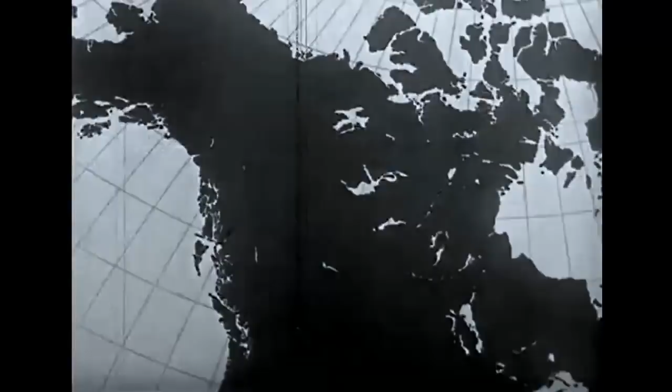Lockheed over North America: United Airlines, Continental Airlines Incorporated, Mid-Continent Airlines Incorporated, Northwest Airlines, Chicago and Southern Airlines, Braniff Airways Incorporated, National Airlines, Delta Airlines, Boston Maine Airways Incorporated, Trans-Canada Airlines, Pacific Alaska Airways.

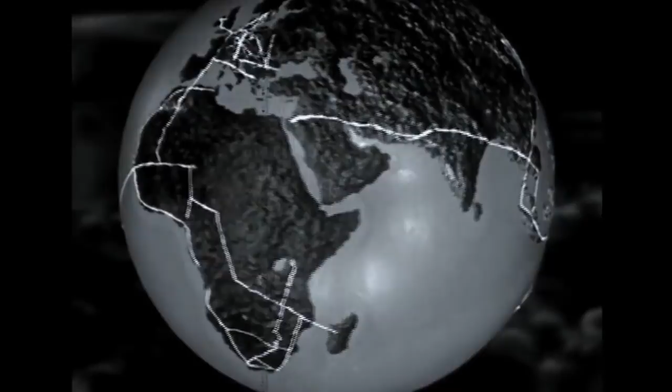Worldwide coverage, but it has not been accomplished in a day. It is the result of a smooth-running combination of men and machines. In that combination lies the story of Lockheed itself. It is a success story, modern, exciting, typically American.

The Lockheed Aircraft Corporation plant, Burbank, California, in 1926. And today, the same company, the same location, but quite definitely not the same plant.

As recently as 1932, sales aggregated the overwhelming total of $23,298.03. In 1940, actual deliveries amounted to more than $42 million, and conservative estimates indicate that in 1941 this figure will be more than doubled.

And to the men of Lockheed belongs a large share of the credit, to their skill and to their loyalty. They are a cross-section of typical American workmen: drillers, riveters, tool makers, die casters, machinists, and technicians. In 1931, there were only 300 of them.

In 1941, over 35,000. Every man who checks in, from office boy on up, has taken and passed exhaustive tests covering intelligence, temperament, and special aptitude to prove his individual ability. 35,000 American workmen, the right men for the right jobs to build the best planes.

This is not a trick shot made with mirrors. It is the drafting room of the engineering department where every new Lockheed has its beginning, conceived with the purpose of supplying the answer to definite needs of the aviation industry. To attain this goal, over 850 engineers make over 5,000 drawing plans, devoting a total of over 200,000 work hours to their mission of creating one new design.

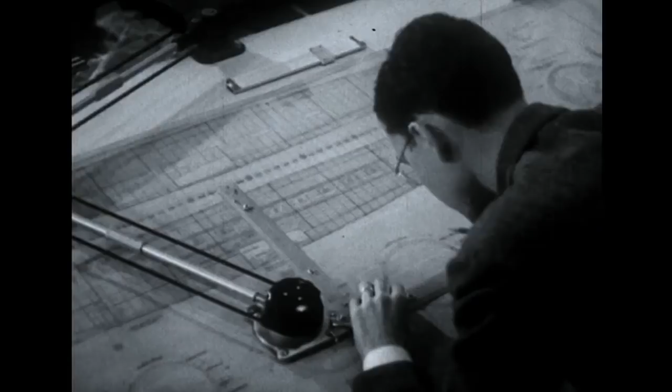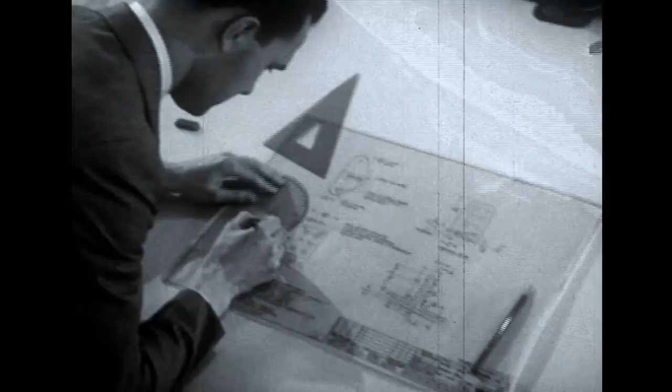The component parts of a modern airplane's wing, fuselage, and tail surface are almost countless in number, yet every single one of them must be engineered. Even the most minute part receives the greatest attention. Four separate drawings are made showing detail from four different angles. Although the part is no larger than a silver dollar, it will have to go a great deal further.

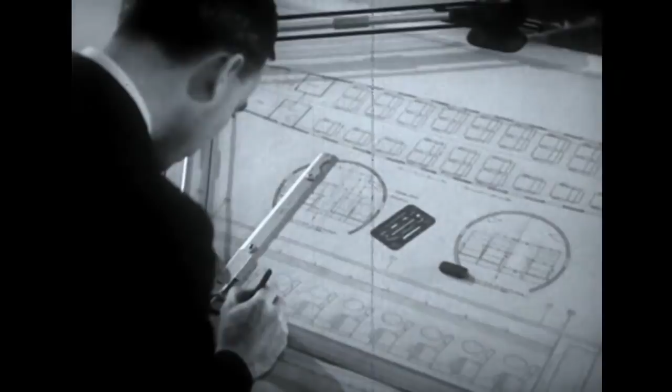The interior of a plane is one feature of design seldom associated in one's mind as coming under the supervision of the engineer. Yet one of his most important jobs is to provide utter comfort for passengers traveling through the air at high speeds. The Lodestar's cabin has been designed for this comfort.

Inside, the sound of powerful motors is reduced to a pleasant hum by scientific soundproofing and vibration control. Restful chairs, ample space, and headroom are results of thoughtful planning, and all Lockheeds are especially adaptable to the requirements of private owners. For businessmen to whom time means money, the Lodestar is convertible into a convenient and dependable office in the sky. The compact 12 becomes a comfortable lounge for attending important events anywhere at any time.

The cabin of Lockheed's new four-motor transport, the Excalibur, will look very much like this. Although the plane is still under construction, the engineers have built an exact replica, known as a mock-up, out of wood. In this way, every possible detail of passenger comfort can be effectively predetermined and applied.

But the ideas and plans that this man and the hundreds like him put into execution are not only those of Lockheed's chief engineers, but those of the entire flying world. For the Market Research Division maintains close contact with the operative branch of the industry. The staff compiles lists of important features relating to a plane's design. These findings are set up in the form of questionnaires.

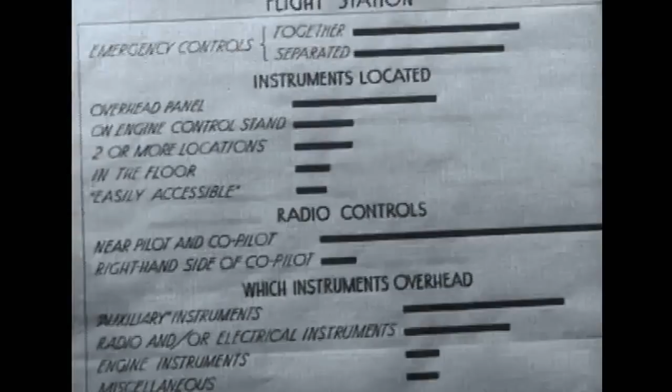Detailed graphs and charts are compiled by competent statisticians. No suggestion is too small. Every answer to every question is checked and noted. These findings are recorded in another pamphlet.

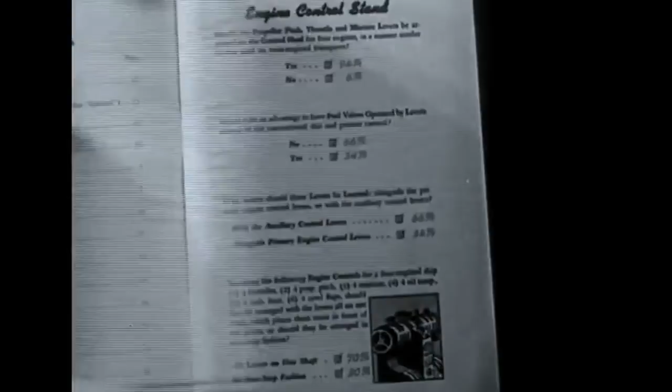You told us this is the way you would do it, on flight station, on engine control stand, and on rudder pedals. We asked, are brake toe pedals desirable? 93% said yes, 7% no. That verdict is submitted by men whose combined opinions represent the experience of over 16 million hours of flying.

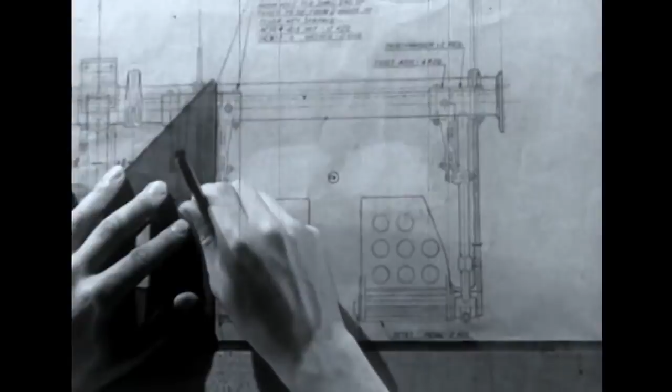These practical viewpoints, as gathered by market research, are submitted to the engineers. They combine these ideas together with their own creative ability in the conception and building of every new Lockheed plane. That's how Lockheed designs airplanes to suit the men who know airplanes best: operators, pilots, and regular airline passengers.

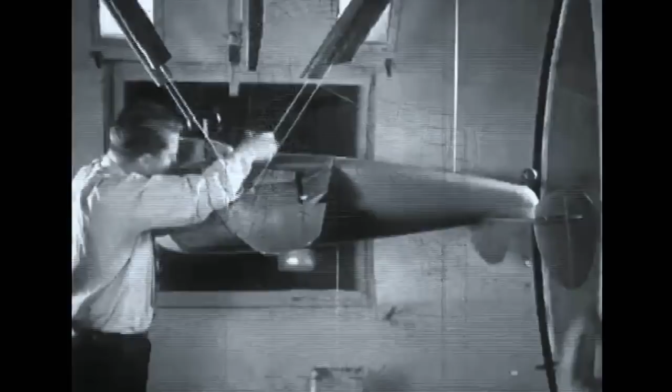And the first form a new plane takes is on paper. From these drawings and thousands like them, an exact scale model known as a wind tunnel model is made and is connected to instruments which determine its flight characteristics. The model is hand-carved, accurate to the fraction of an inch, weighs over 500 pounds, and costs more than $5,000 to build.

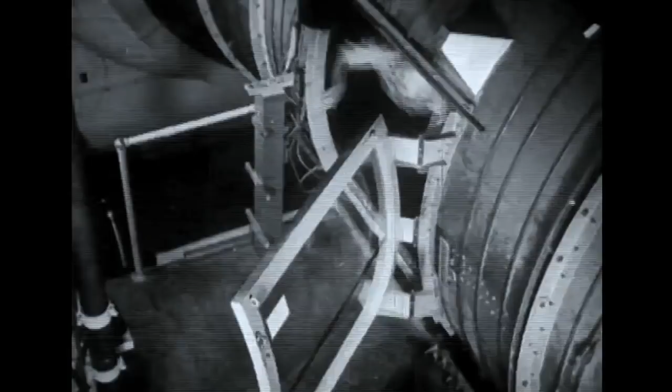The door is closed, the wind tunnel sealed. A flip of a switch and the wind propeller whips up to speed. The model is exposed to a far higher velocity than this 90-mile-an-hour wind.

The small wind tunnel model is actually subjected to and withstands a much greater force.

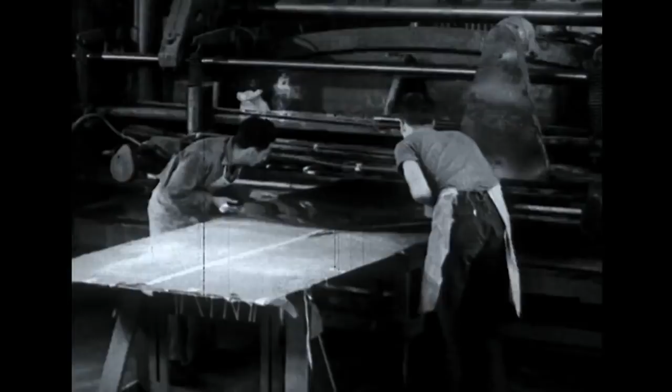Giant shears act as huge mechanical scissors. Metal sheets are slipped into place. The sharp blade strikes and cuts through them as if they were cloth.

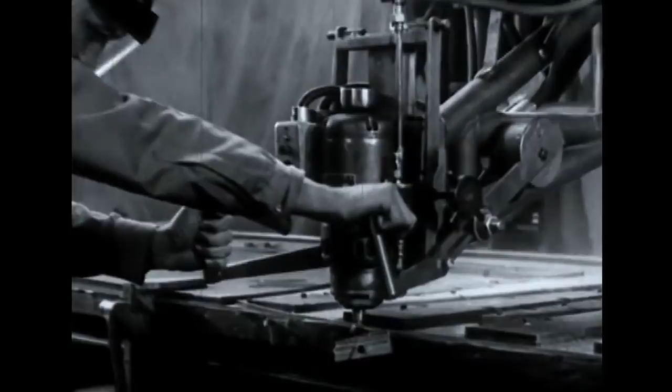The high-frequency router, a dental patient's nightmare, turns 15,000 revolutions a minute and cuts layers of metal into their first rough shape. The bit turns so fast that it must be cooled by a constant stream of oil.

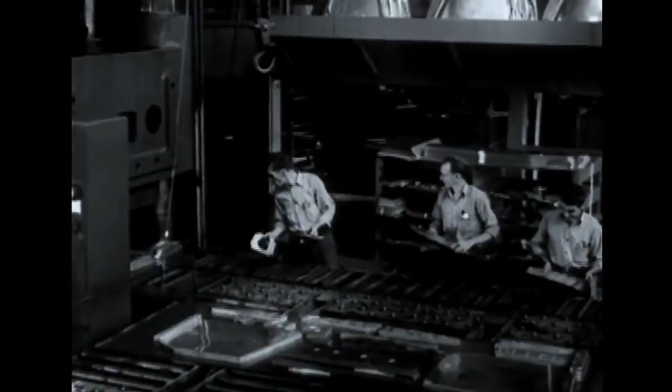The massive hydro press exerts an overall pressure of 9 million pounds, and it literally squeezes parts out of metal. An endless chain of roller conveyors carries a tray with the forms to workmen. They put the metal, which has already been cut to the correct size, in place on the forms. The tray now continues on its way into position under the press.

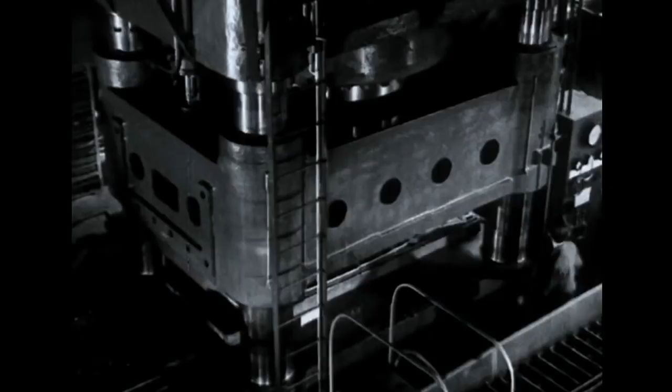The operator touches a switch, the press starts down, and look out below. Almost unbelievable pressure, an irresistible force, but under perfect control. And where plain sheet metal went in, finished parts come out. The hydro press turns out more parts in 1 minute than 2 men could complete in a whole day, and turns them out better and more accurately.

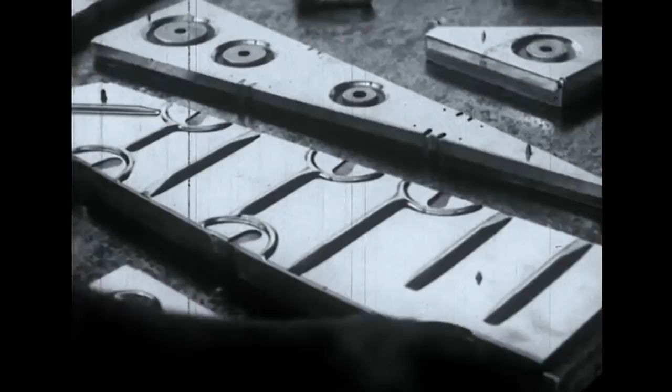A compressed air stamp which forges metal is an excellent example of powerful machinery under absolute control. Taps as gentle as a tack hammer, then the crushing impact. What a nutcracker this outfit would make. And yet its control is so delicate that it can crack an egg, at least so the operator claims. Look out there, a little too hard and you'll have an awful mess. Be careful.

Skilled men and precision machines have fabricated these parts, but even metal can be strengthened and protected. To do this, there are several types of processing. Complete electrochemical anodizing baths provide parts with a protective coating of oxide film.

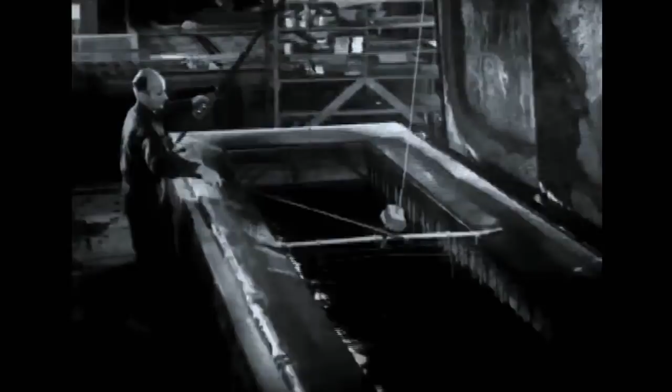This is a safeguard against the threat of corrosion caused by moisture. It is an interesting fact that these parts are protected against any harmful effects of moisture by being given a bath. Another type of bath is used for a different purpose.

In order to harden and thereby strengthen certain parts, they are immersed in a hot salt solution of sodium potassium nitrate. In large ovens, other parts are hardened by baking at 1550 degrees Fahrenheit and quenching them in oil.

It is easy enough to say that these parts, which will eventually be the plane, are strong. To prove that they are, to constantly guard the Lockheed measure of strength is the duty of the testing laboratory.

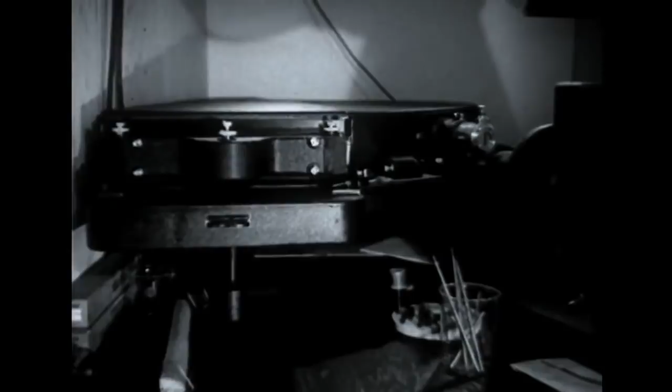A spectrograph is one of the most modern scientific testing devices. It analyzes the purity of the metal alloys which go into a plane.

Tremendous heat created by an arc burns sample filings of the metal. These filings are placed in a cavity on the lower of 2 acid-treated graphite electrodes and then burned.

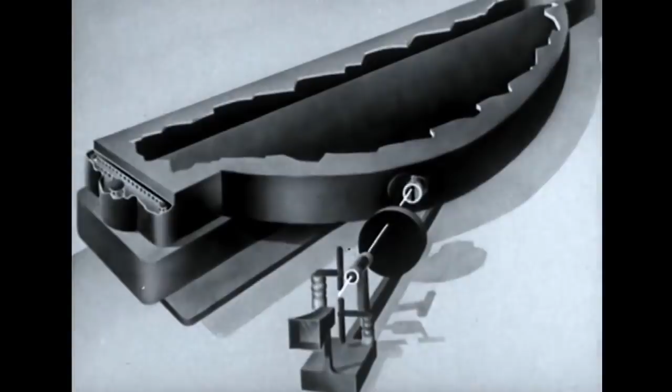The light of the burning metal passes through a lens and then through a rotating sector, the adjustable opening of which controls the amount of light falling on the slit. The light now passes through the slit and falls upon a diffraction grating.

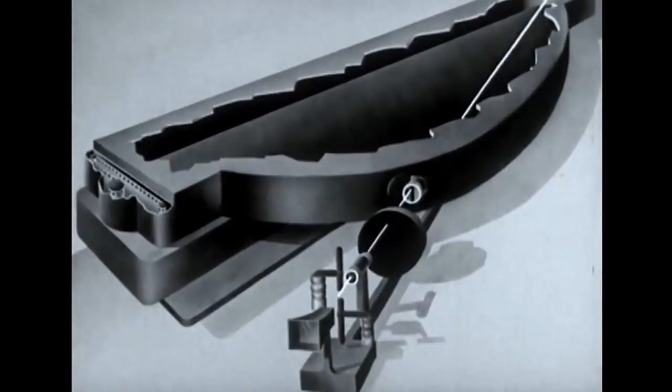This diffraction grating is a concave aluminized glass plate on which 24,000 lines per inch have been ruled with a diamond point. The light is separated by the grating into wavelengths.

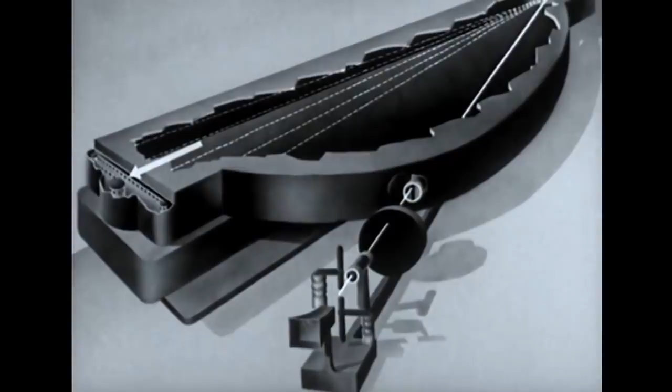These wavelengths, or light rays, fall upon a strip of film, and a photographic record of them is thus produced. Since each element has its own wavelength, from the developed film it is possible to determine exactly which are present in the alloy. In this manner, the spectrograph immediately detects all impurities, and any inferior metal is promptly discarded.

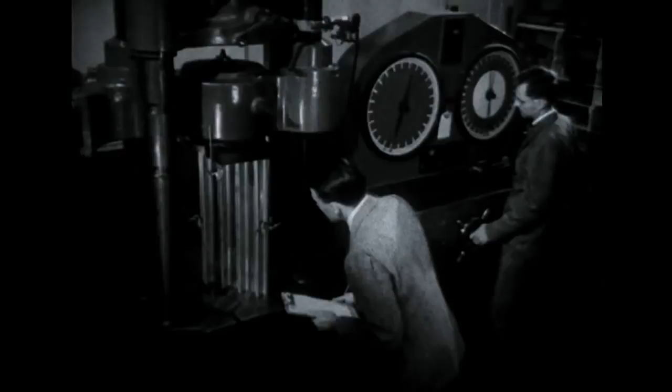The sole purpose of this huge machine is to break things. Its powerful jaws, capable of a compression of 300,000 pounds, are about to crush a small section of the wing in order to measure its resistance.

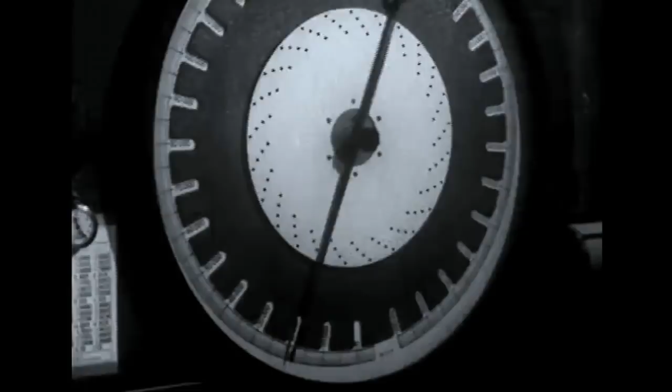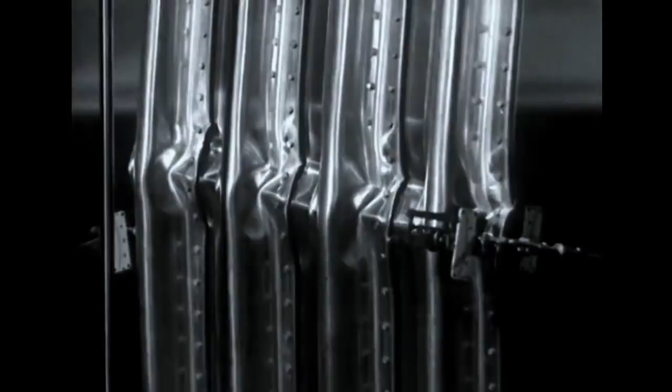Now watch carefully. The upper jaw is clamping down with an invisible, relentless force on the seemingly frail strip of metal. But actually, just how frail is it? 60,000 pounds? 70,000? There it is, a slight ripple. The breaking point has been reached, and it takes a pressure of over 80,000 pounds to even bend this frail little section of a wing.

For contrast, let's see what happens to a solid cylinder of concrete, which certainly appears much stronger. There is the first crack, and the concrete shatters completely under a pressure of less than 75,000 pounds.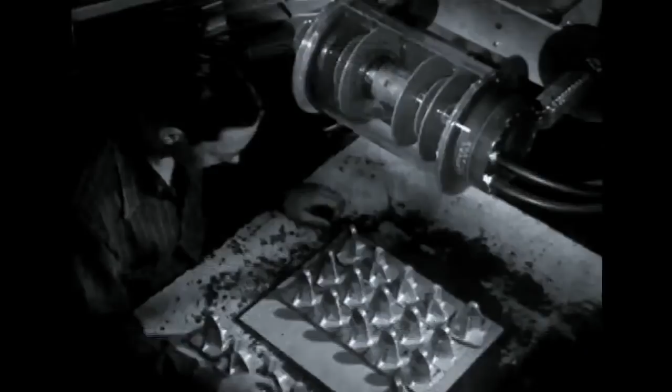All stressed parts, such as forgings and castings, are X-rayed for any possible flaws in the metal. Lockheed X-rays more parts than all other aircraft manufacturers combined. They may look new and shiny on the surface, but that doesn't matter.

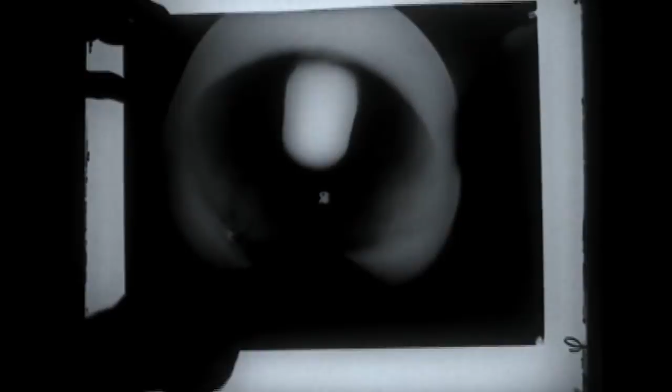What are they like underneath? This batch is fine, perfect. A different story here. Those slight, almost imperceptible flaws which doom it to the scrap heap would be invisible to any eye other than the X-ray. Therefore, although it is important to know what is on the outside of a plane, every stressed part is X-rayed because Lockheed thinks it is even more important to be absolutely positive of what is on the inside.

Yes, every part of this plane is built for the strength, ruggedness, and durability to achieve the highest speeds. And there goes the Lodestar. Carrying a full load of 17,500 pounds, it speeds down the runway for the takeoff. In 15 seconds, after a run of only 860 feet, it leaves the ground and soars into the air. Climbing rate 1,200 feet per minute.

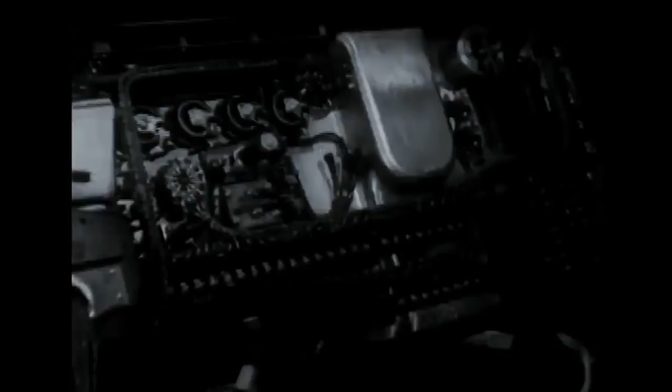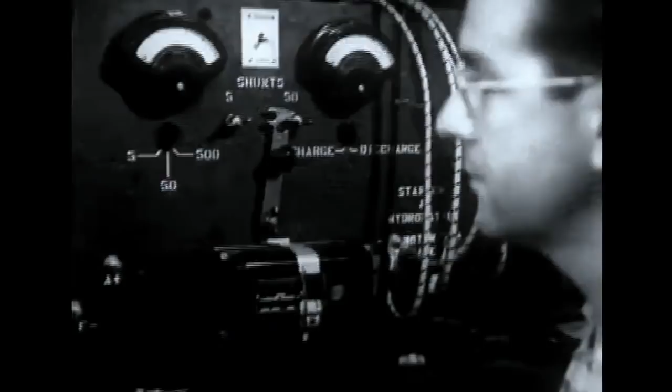While the plane is in flight, the dials and indicators on the panel are the guides by which a pilot flies. Over a half a mile of wire connects them with the controlling instruments, which must be infinitely accurate before they are installed. In the instrument testing laboratory, each instrument and accessory is, to all intents and purposes, actually flown before being installed on the plane itself.

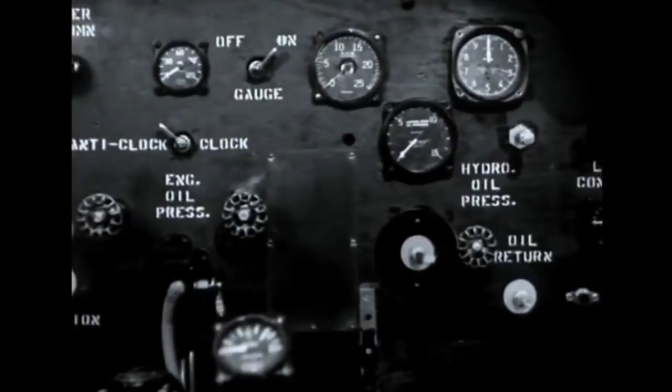For instance, on this stand, a motor duplicates the swing of a plane to test the turn and bank indicators. Here, tachometers are also tested, and propeller governors, vacuum pumps, fuel pumps, starters, generators, and hydromatic motors for feathering propellers. The automatic pilot is checked by a vacuum system against mercury manometers.

This small box can guide a plane in flight, keep it as true to its course as the most experienced pilot.

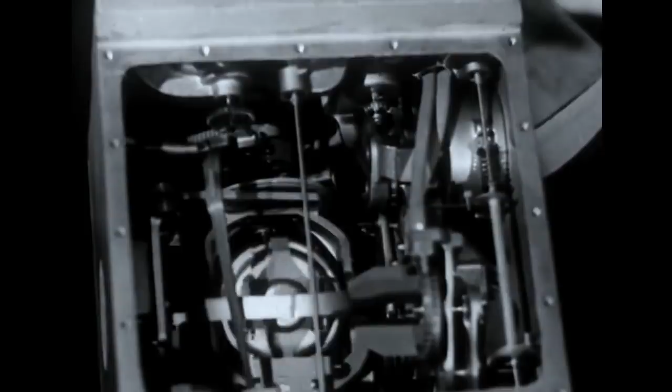An airplane is a chain of which the thousands of separate parts are the links. They must be forged together in order to shape the wing, the tail, and the fuselage. The duty of the wing is to provide the lift that sustains the flight of an airplane. Here in the plant, it must be assembled as flawlessly as it was designed.

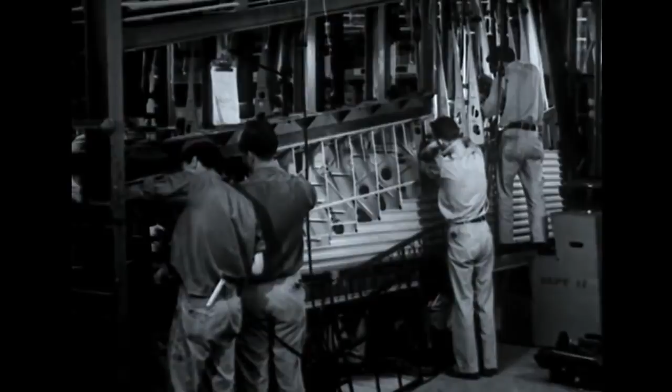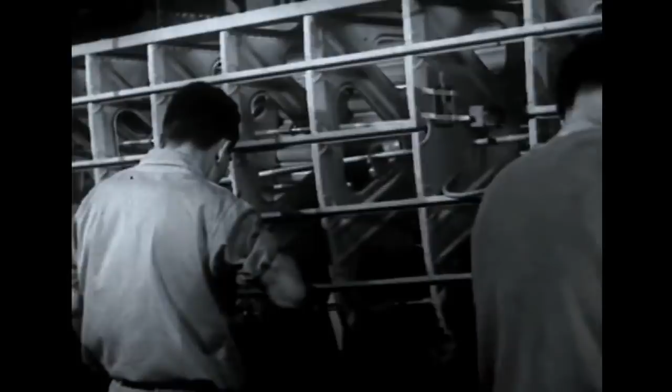Although a wing is generally considered as a unit, it is really composed of 3 parts, 2 outer sections and the center section. We are all familiar with the general shape of a wing, but while an outer section is in the first stages of assembly, we can get a good idea of the complex structure on the inside. Every rib and crosspiece has its purpose. Remember, it was just a small part of the wing that we saw withstand a compression of 80,000 pounds.

Each operation is executed with precision and care as the outer section moves down the production line and takes shape. High-speed electric drills punch holes for the rivets. There are more than 700 drillers or riveters who have all had previous training. Even so, before they're assigned to actual production, they must attend Lockheed's own school until they can uphold the plant's standard of efficiency and skill.

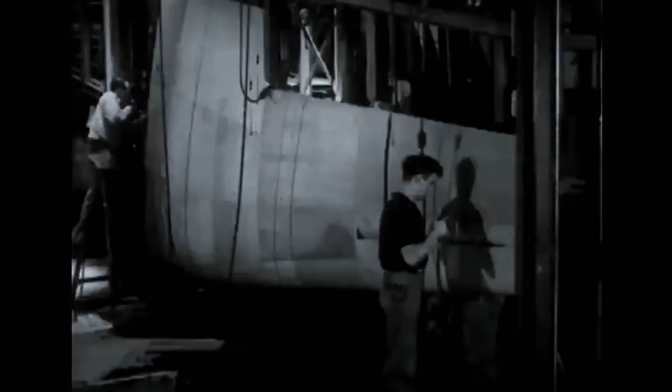There are more than 50,000 rivets on a completed wing, and every one of them is checked, examined, and checked again. This requires an army of over 200 inspectors, such as this one. But by the time a Lockheed plane is assembled, every square inch of it has been inspected at least 5 times. Inspector number 158 finds this row perfect and okays it.

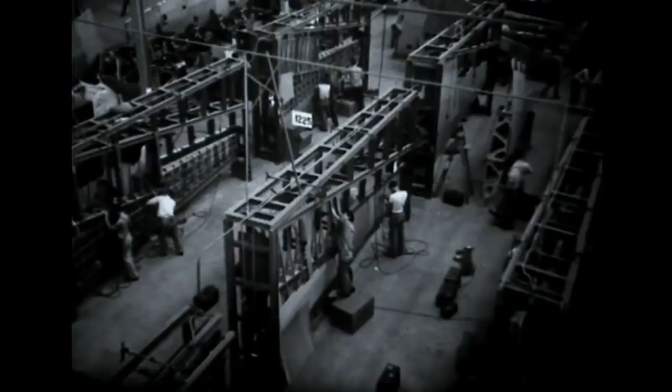And the story of one outer wing section is the story of 10, of 20, of 1,000 sections as they move down the line in an endless parade. Mass production with the emphasis on precision and quality.

The assembly line for the center section of the wing is one of the largest and most vital units in the plant. It has to be because the center section is the strong man of the plane. It must be constructed and assembled so as to be able to support heavy loads and to withstand great strain, for it unites the 2 outer wings with the fuselage.

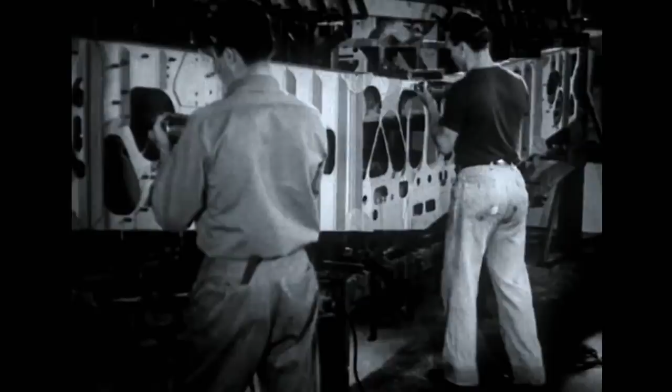The fuselage will eventually rest in the gap between the 2 shoulders, and the wings will be joined like arms on either side. The main beam of the center section is the strongest part, the backbone of the entire plane. Like a bridge, it must carry any burden with steadfast dependability.

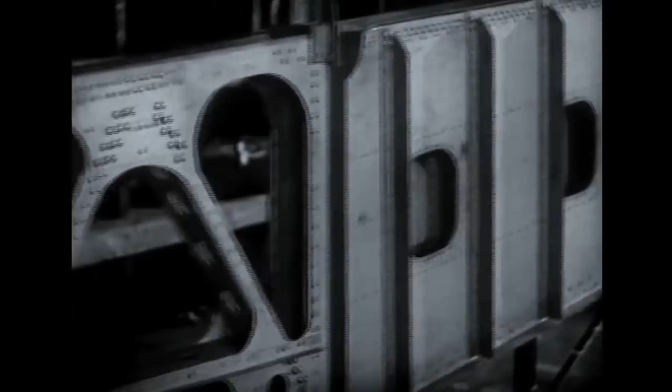And the main beam is built just like a bridge. At all times, it carries all of the flying load, the engine load, and the landing load. And it is stressed to support more than 5 times the total weight of the fully loaded plane. Completed and assembled, capable of supporting a static load of 70,000 pounds, the wing will do its job as the men who built it have done theirs.

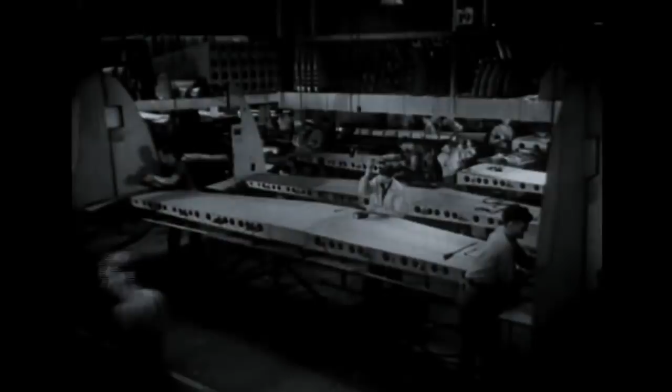The tail surfaces control the maneuverability of a plane. The use of twin rudders was developed by Lockheed and is one of the distinguishing features which point out every Lockheed. The fuselage is the body of the plane.

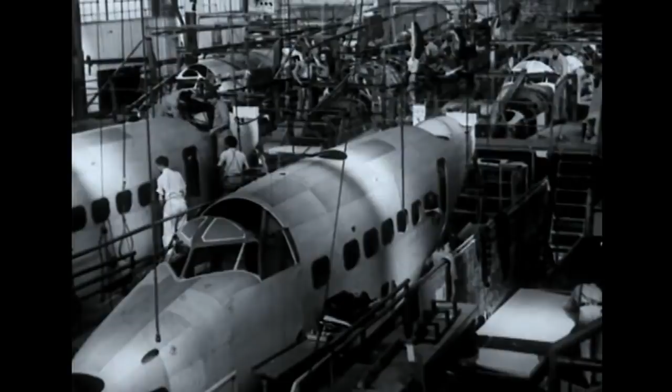It represents the final word in aerodynamic design and streamlining. During construction, these basic principles are built into the fuselage and applied to every operation from the beginning to the completed shell.

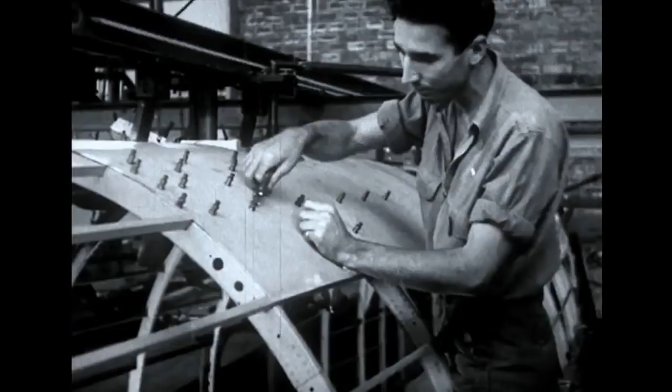As the first step in its assembly, the bulkheads are joined together by stringers, which form the basic shape and strength of the fuselage. Skin fitters then fit and shape the metal sheets, attaching them with removable fasteners. On their heels come the riveters, while every stage of the assembly is constantly under the close check of inspectors.

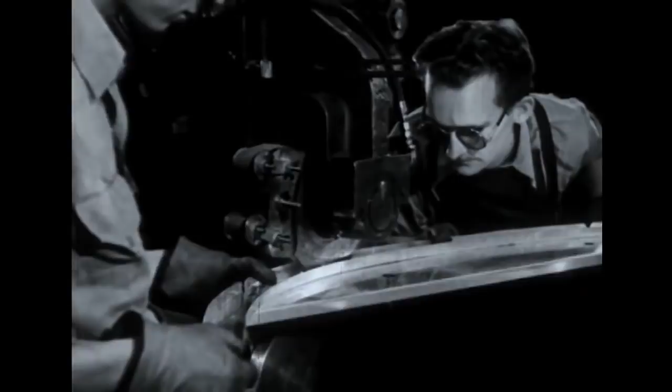Assembling with electric continuous spot welders facilitates production and gives many fuselage parts an extra smoothness for better streamlining. With an eye to the future, Lockheed is constantly enlarging on this process because better streamlining means greater speed.

And so another fuselage is finished and ready for mating with the wing. Like a ship being launched, it moves slowly down the ways. Slowly now, yes, but for just a little while longer.

Soon sunlight will be glinting from its metal sides. Its nose will point upwind. In the comfort of its cabin, passengers will read or write or sleep or think after their own fashion, and beneath it, the lakes, rivers, and valleys of the countryside will unfold.

Slowly still, the fuselage is lowered into place, united with the wing, and now, slow no longer.

Speed on the water. Speed on the snow. Speed on wheels. On rails. Speed on wings. There is truth in the slogan that it takes a Lockheed to beat a Lockheed.

And as the plane approaches the field, it slows down for the landing. The Fowler flap has been adopted and developed by Lockheed. The flap gives a greater lift to the wing and provides a brake action to reduce the speed.

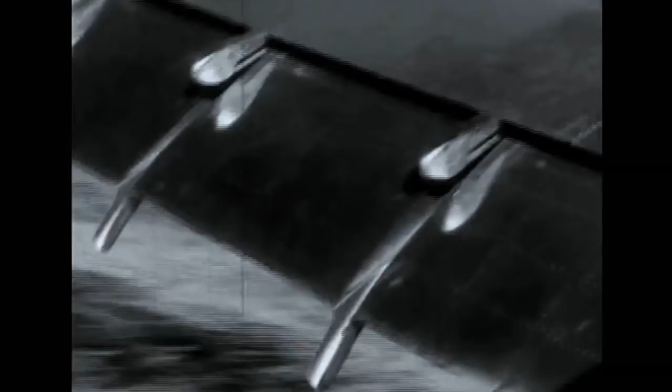The plane lands at 65 miles an hour, and from a height of 50 feet, it can come to a complete stop in less than 600 yards. This Lockheed Lodestar, with its safety, its comfort, and its great speed, typifies the ideals of aviation in America.

To protect these ideals, Lockheed is contributing its share toward national defense and the defense of democracy in other parts of the world. These B-14 bombers, better known as the Lockheed Hudson bombers, are rolling off the production line at an ever-increasing rate. They have been ordered in great quantities by Great Britain and Australia.

When ready for delivery by boat, the Hudson bombers are dismantled. The sleek fuselages are carefully encased in canvas, and the wings, already stowed away below deck, are crated in wooden frames for safe shipment. When the planes reach their destination, they are easily reassembled and soon ready to take their places in the staunch defense of the British Empire.

And while these planes start on their long journey by water, others are being given their final test flights for the tough job ahead. And still more are winging their way directly toward Canada. In combat, in actual line of duty, the Hudson bombers have won a name for their efficiency and dependability.

And as America builds its planes for commerce and for defense, it is well to remember that Americans invented the airplane and developed the modern conception of mass production used by Lockheed.

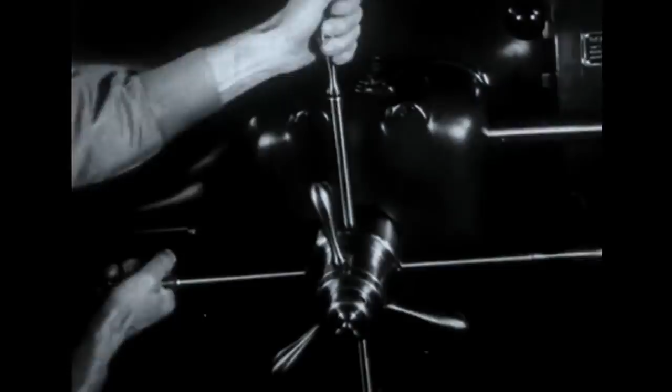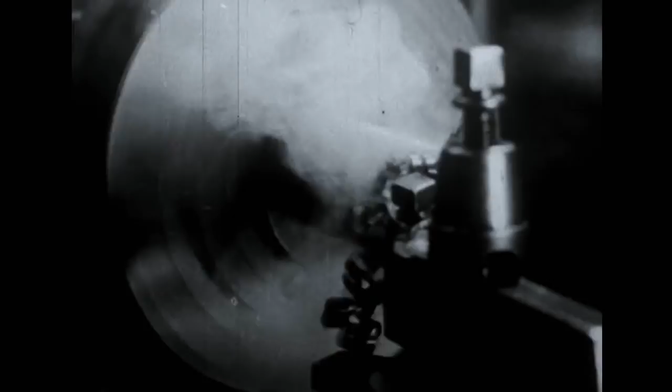And out of the vast production line come Lockheed's: the 212, the Electra, the 12, the Hudson bomber, the Lodestar, and now Lockheed's answer to the challenge of our times, the Interceptor Pursuit P-38.

It has been developed solely for national defense, and Army officials consider it the fastest military plane in the world today. The P-38, a man-made comet.

The P-38 is a completely new development in conception and design. The purpose of this deadly single-seater fighter is to prevent any would-be attacker from reaching his objective.

Lockheed is building vast quantities for the United States Army, and many of its features are closely guarded military secrets. But it can be revealed that the P-38 will climb a mile in a minute, and its motors are so quiet that it can approach any target almost without warning.

And as wings soar higher above America, so are soaring the hopes of free men the world over. For they know that whether it be for commerce or defense, ship for ship, American planes have no equal.

And just as Lockheed commercial transports serve the people, so do the Lockheed military planes stand ready to serve should the need arise. The striking power of Hudson bombers, the speed of the P-38 — envisioned by Lockheed, engineered by Lockheed, built by Lockheed.